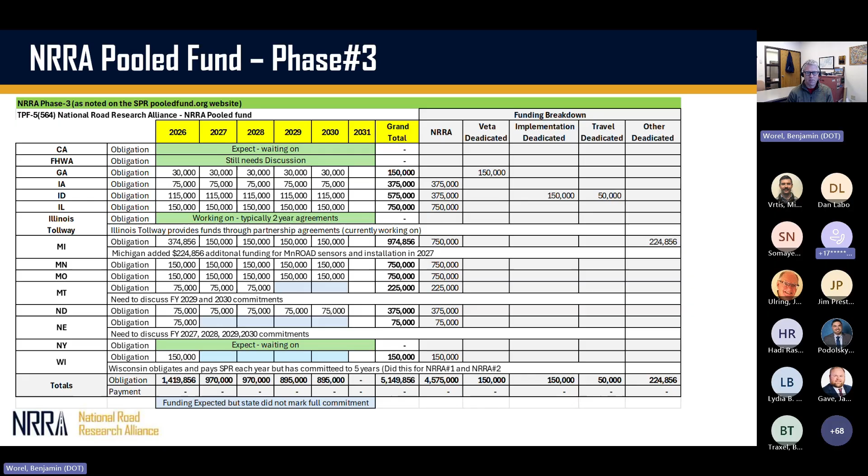So when it all comes down to it, when we start getting dollars in, and this is getting towards, well, how much money do we have to spend? There's SPR dollars, I'm going to say dollars in hand, meaning what's shown on the website. So this is like one bird in the hand is worth 2 in the bush type of thing, where you're saying, we know we have so much dollars in hand, but we expect so many dollars. Like I said, Wisconsin puts in money every year. So you kind of assume that the money's there. And this is something I'm working on with MnDOT. In the past, we assume money is there, and money tends to come to be there to spend. So these two things here show what we have in hand or what we expect, a reasonable expectation.

So you can see how there's the NRRA activities. Some money was put in just for Veta. It shows 1 state's put in, but we expect 2, the 150 to 300. 1 state put some extra money in for implementation. Travel, 1 state put more money in, but we expect more to do that. And then the other was the concrete stuff. But again, we're working this with the executive committee. So when you looked at what the executive committee initially set up, they set up certain percentages for each activity. So we had research contracts, labor, sensors, shipping and stuff at MnROAD, out-of-state travel, the construction we wanted for the low volume road, and then tech transfer.

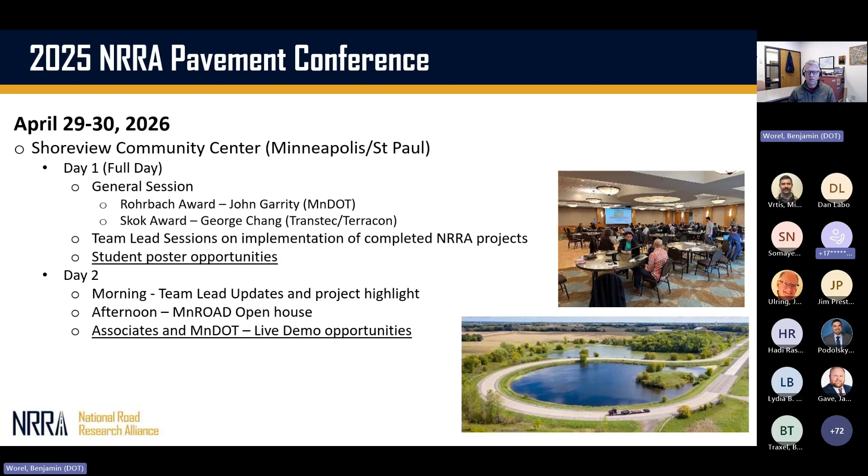But we'll also have day 2, we'll be doing some morning updates in Shoreview. Then in the afternoon, going out to MnROAD and having an open house. That's a good opportunity; there's been some groups talking about doing demos for equipment and things like that, maybe some presentations out there on what they're doing. So again, more information will be coming out in the future about the Pavement Conference coming up.

It's only 5 feet deep, so I didn't fish very long because I don't think there's anything there.

But the rest of the agenda: Michael will be filling in for Kurt Dunn for the Flex team. Tom will be working with the Rigid, ICT with Kyle, PM with Tyler, and Geo with Raul. Raul's gone, so I'll fill in for him. We'll probably do a little less Geo this time, so we'll leave some extra time for the Flex and the PM that I think have a little more time needs for this quarterly meeting.

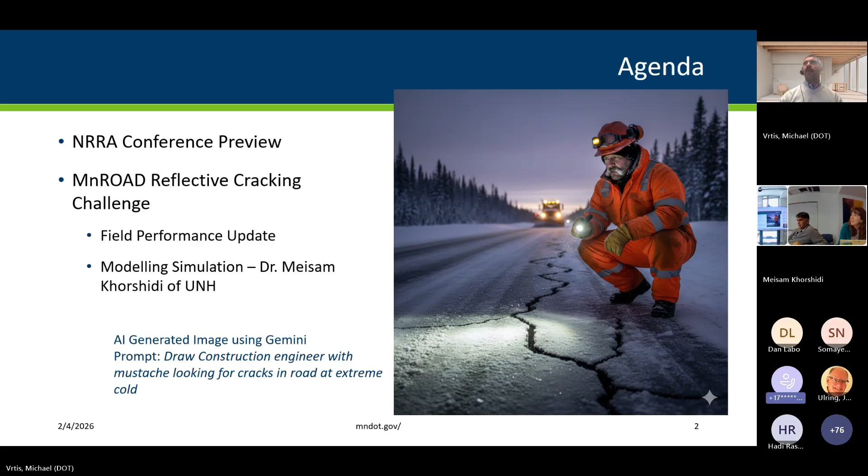So for the NRRA conference, we are going to be combining with the PM team and sharing some time. We're really excited about the speakers we have lined up. We have some really high quality and polished national speakers on exciting topics. How Kurt and I like to approach this, or the flexible team in general, is what are we working on? What's happening in asphalt that we want to share with the wider audience of basically a pavement engineering audience, not particularly asphalt experts. So what do we want our other pavement friends to know that Flex Team and Asphalt is doing?

So we have Dr. Bill Buttlar from University of Missouri on the companion sections to the sections I'll be talking about today. And then we have Dr. Jo Daniel of New Hampshire talking some balanced mix design. And then, looking towards the future, we have Dave Johnson from the Asphalt Institute talking about the Utah High Mod sections, or Utah High Mod mix. It is something that both the Flex team and the PM team have rated highly for future construction ideas. So it is something that we will probably look at through the NRRA lens. But Dave will give an introduction to that. And really, it's a highly polymer modified asphalt placed at extremely low air voids.

And then day two really is the teaser I'll be giving today. I'll do a more thorough performance update from the MnROAD sections, and then the lab testing correlations that go along with that will be provided.

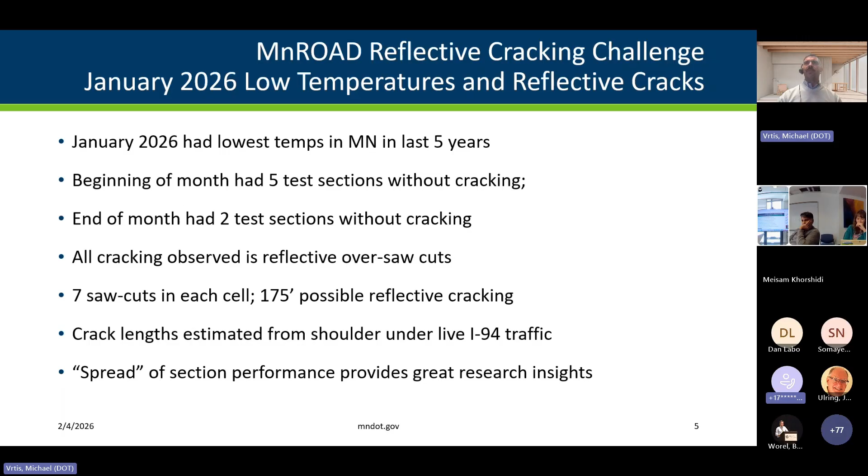So just a reminder, we took our conventional 400, 500 foot test section and we literally saw cut it in half in the lower lifts. So the 2 lower lifts total 4 inches thick, and there is a transverse saw cut at fixed locations, 7 cuts in each cell, same spacing in each cell, really providing the same platform 10 times so we could evaluate 10 different overlay mixtures. So I'll be focusing today on some of the control sections where we're changing the binder grade. And then additionally, I added section 2234 just to talk about some of the ones that have intermediate performance that's falling in between our control setups.

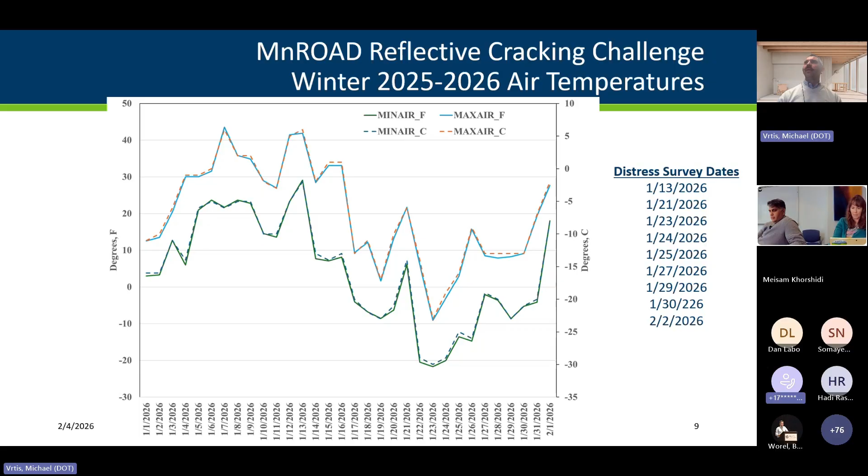Survey dates, we really were closely monitoring our reflective cracking and naturally occurring thermal cracks, which we did not see at all over the month of January. So as we were going through this cold stretch, we were looking at it almost every 24 hours, seeing what cracks were new, and when reflective cracking did occur. So summary, kind of picking earlier in the month before we had cracks, or beginning of the cold stretch, and then end of the cold stretch. Remember, it was the 23rd that was our coldest temperature.

So focusing on these 4 cells, 2239, a polymer modified 58H minus 34, held pretty steady throughout, where we came into the month with 2 out of the 7 cracks, 5 feet total, so very minor cracking, still visible. And then it ended with 6 feet total. The 49 minus 34 still has no cracks in any of the saw cut locations or anywhere in the section. Going to the other binder, the 58S minus 28, it was cracked going into January, and then a little bit of increase in the crack distance, but still pretty heavily cracked, reflective cracking throughout.

And then I added cell 2234 to this presentation. It started the month with no cracks, and then by the 21st, 3 out of the 7 had cracks, only 8 feet, so still just a couple feet in each of those saw cut locations. And then at the close of the month, we had 4 locations cracked with a total of 17 feet.

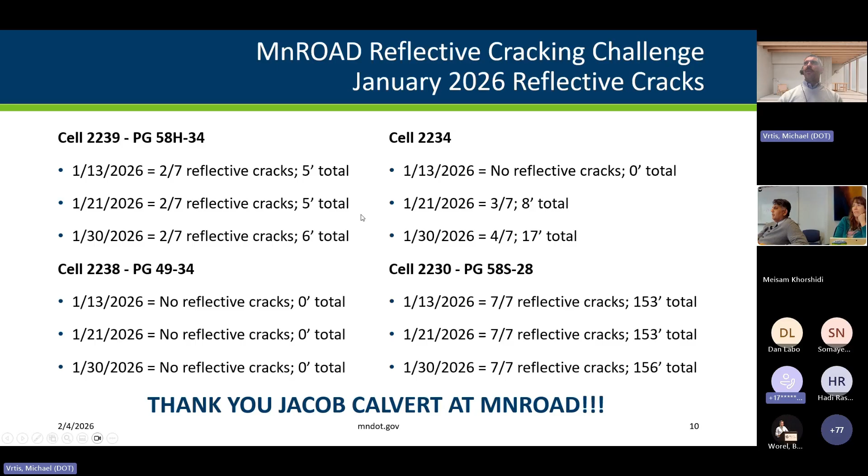All right, at this point, I am going to turn it over to Meisam to share the modeling updates from the New Hampshire side of things. All right, thank you, Michael.

I want to walk you through our report to predict the performance of the test sections using four mechanistic and mechanistic-empirical models, including Pavement ME, TxACOL, FlexPAVE, and IlliTC. For these models, the pavement structure, underlying condition, traffic, and climate inputs were kept constant across all the sections, and the only input that varied was the material properties, as Michael mentioned, measured in the earlier project tasks.

We also explain how mixtures were ranked based on the output metrics from each model and how we compare those rankings with the cracking performance that you just saw. Next slide, please.

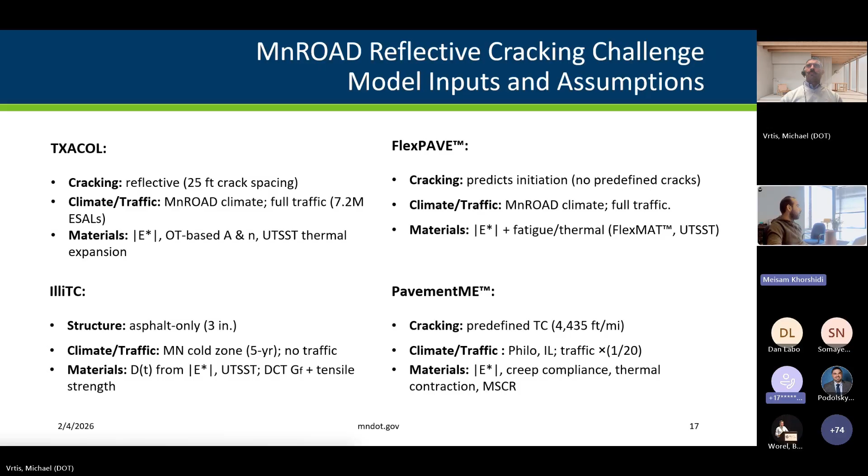So here I talk mostly about the materials we have used for each model. We mostly use dynamic modulus and also the thermal contraction and expansion properties for all models. But at the same time, we use some specific properties like fracture properties extracted from the overlay tester and also fatigue results to run the analysis in the models. Next slide, please.

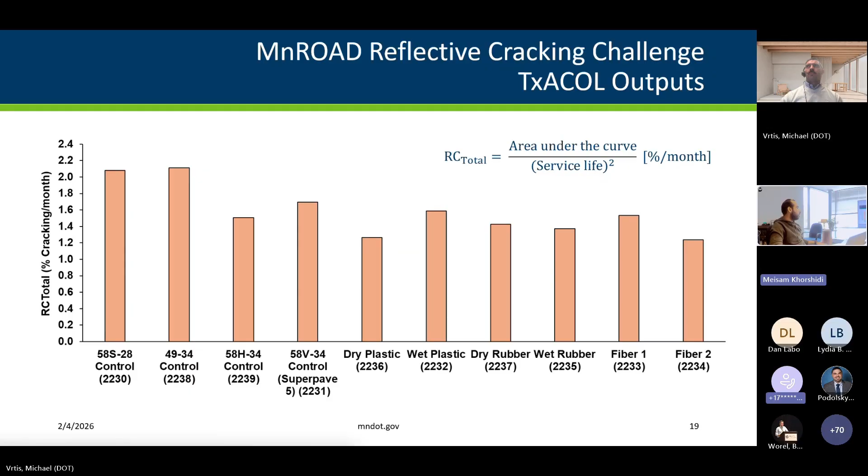Yeah, so we could get RC total based on the service life and the area under the curve, as you see in the equation here. So we could get a single value for each test section, and then we converted those to a ranking for each model, especially here for TxACOL. Next slide, please.

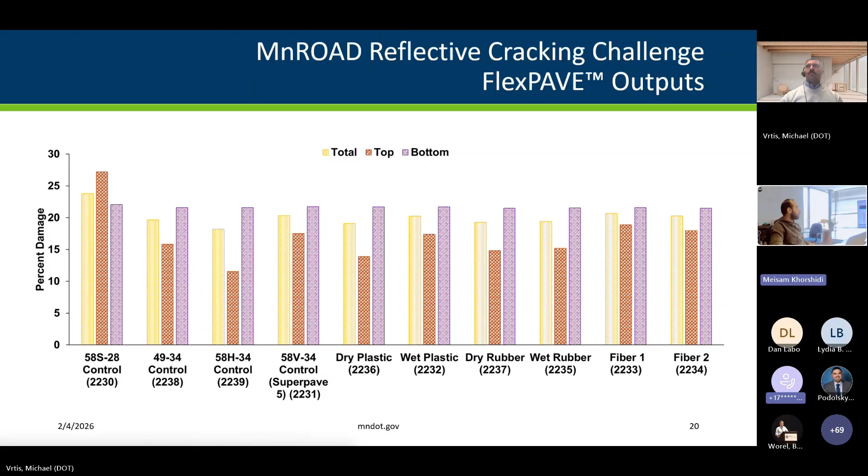For FlexPAVE, we could get percentage damage as an output for total, top, and bottom damage. And for the sake of ranking, we use the top damage to rank and compare the mixtures from this specific model or tool. Next one, please. Can you go here?

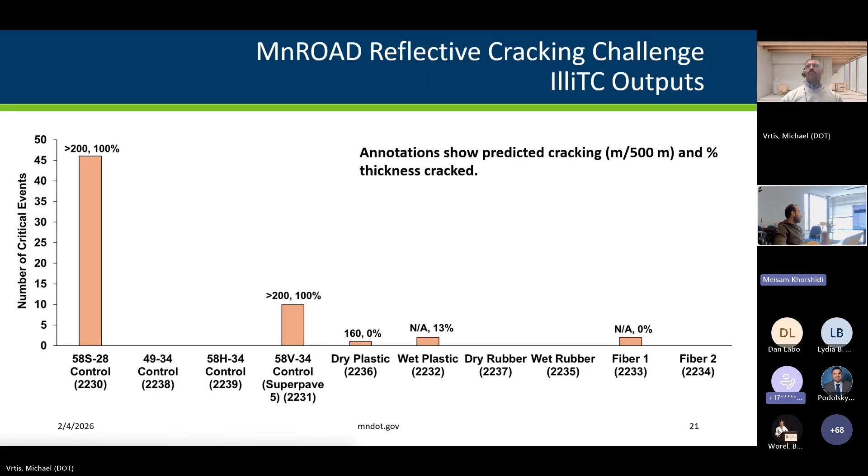And for IlliTC outputs, we got three different outputs, but we use the number of critical events because we could get more distinction between the mixtures and test sections here. So we look at the number of critical events, but as you see, the annotations on the top of each bar show the predicted cracking amount and the percentage of thickness that has cracked through the overlay layer. Next slide, please.

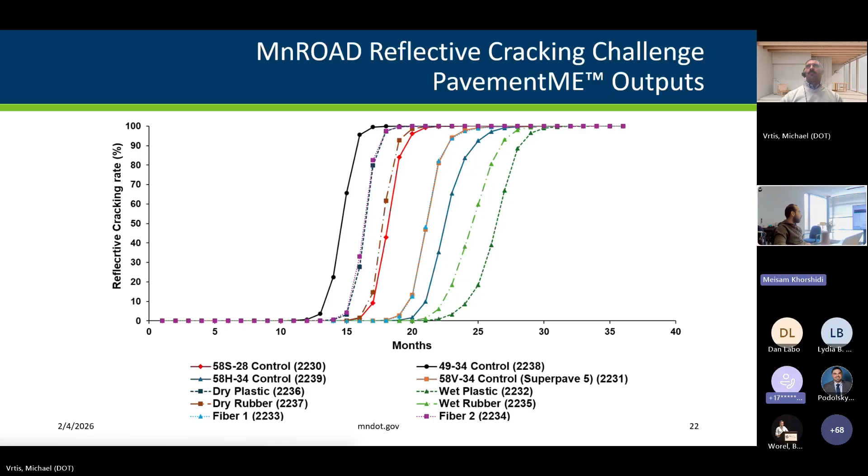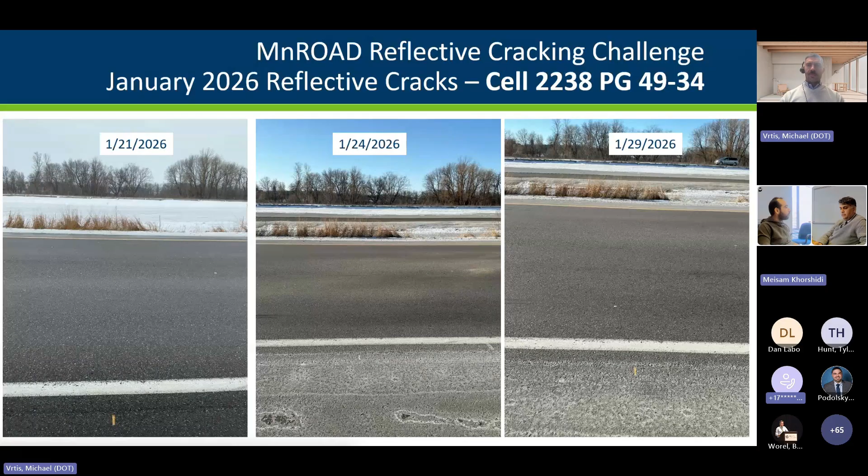Tom, you ready to present for the rigid team? Sure. Let's see. I can see your presentation. Mm-hmm. Is it in a good mode? Good enough. Go ahead. Okay.

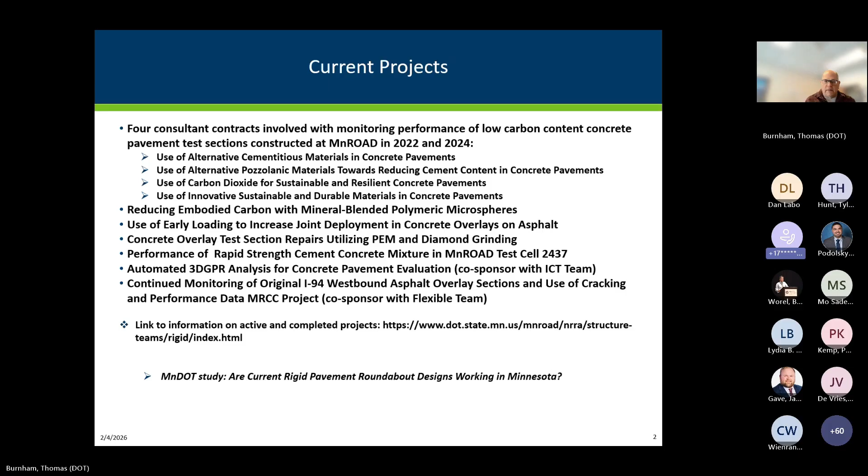Projects in development: Ben mentioned that we have several lined up for contracting to continue monitoring the performance of those low carbon concrete test sections. And we're starting to plan for some sections on the low volume road and also the stockpile area. Some of those ideas involve placing materials that have been used at the UC Davis Lab to Slab project, and also some sections that the University of Pittsburgh has been studying. Similar to MnROAD asphalt and the NCAT track, this would be a concrete version, where we have sections built in different climates with the same materials.

We also have interest in understanding the opportunity of maybe reducing our dowel bar diameters. So we put together a test section where we will have various configurations of dowel bars, both size and spacing.

And then something called the pavement buckling test pit that I hope we can explore. That would be put in the stockpile area, where we would try various surfaces as well as materials underneath and try to understand the mechanisms that cause the pavement buckling we continue to see during very long hot stretches in the summertime. We're hoping we can tackle that this year because it's a little more affordable than some of the full-scale sections.

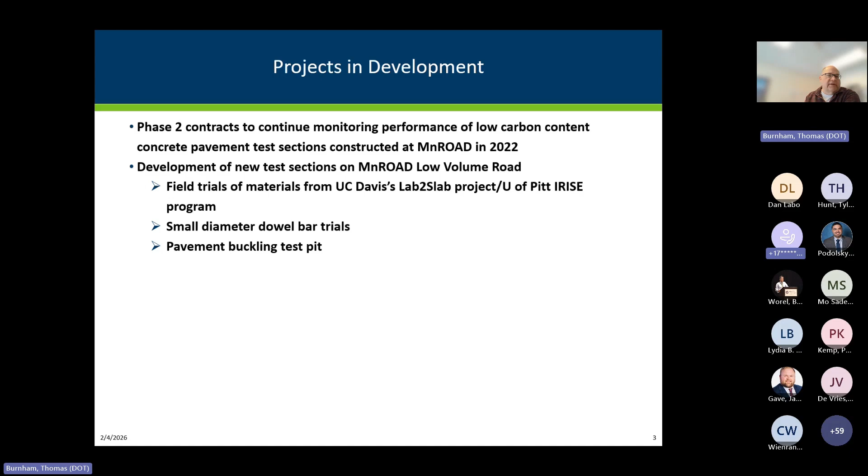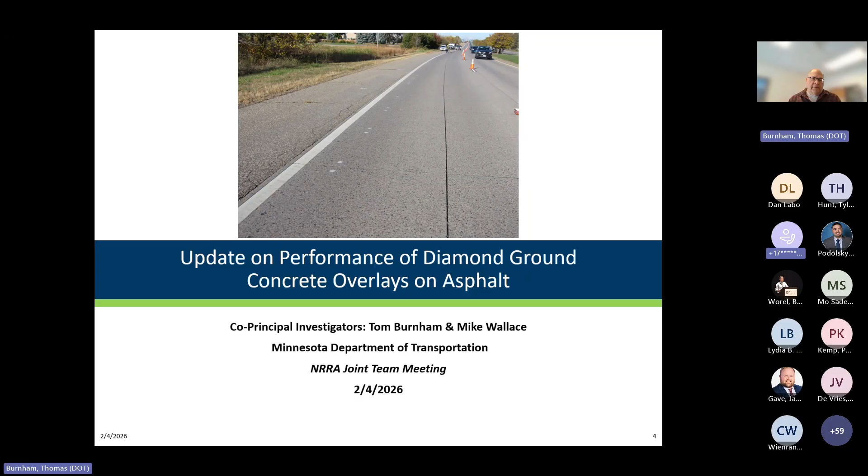So I'm going to devote the rest of my time to giving you an update on this project of the performance of diamond-ground concrete overlays on asphalt. And that's being done again by me and my colleague Mike Wallace. So I'll give you some background, the objectives, and then talk about some performance results from the 4th year of the Woodbury project and the 2nd year of the I-35 North Branch project.

So just so we're clear about what we're talking about, concrete overlays on asphalt, often in the past called whitetopping: a concrete overlay on an old asphalt layer, typically milled, not always, but typically milled to improve the bonding, and then just whatever's underneath as far as base and subgrade.

Some of the features of these thin concrete overlays is that the panels are pretty light. When you start to look at the weight of the actual panel, in this case a 5-inch with the 6x6 panel, which is very typical, it weighs 2,250 pounds. Now you compare that with your axle weight, which you look at 9,000 or more. These things can get pushed around quite a bit. It's not like a big, huge, heavy slab that we have on normal pavement.

And again, for concrete overlays on asphalt, the panels are bonded when they begin. What we notice is that over time, at least in the Minnesota climate, we start to lose that bond. Water gets in the joints, starts working at the bond, and once you lose that bond, then again, you have just a very thin pavement laying on top of an asphalt layer. And really, the idea is that you'd like to take advantage of that bond and reduce the stresses in the concrete surface.

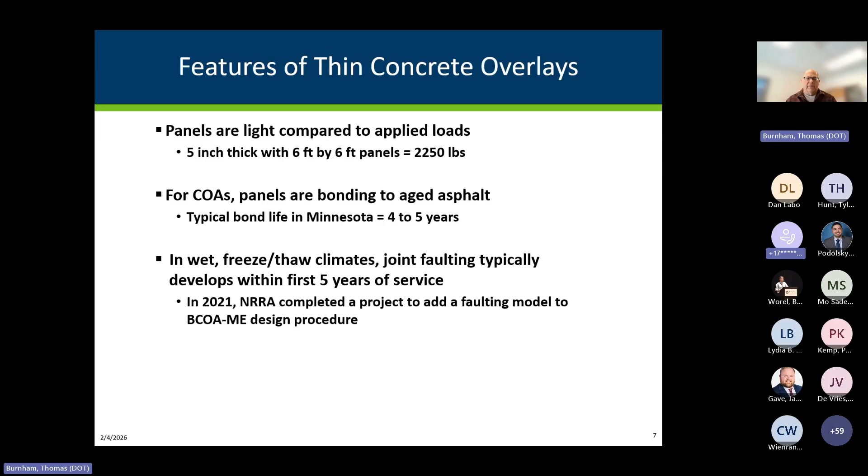Now, in wet, freeze-thaw climates like Minnesota, we have seen a pretty regular trend that the transverse joints start to fault, typically within the first 5 years of service, which is not something you want to happen. And in fact, this has been recognized, and back in 2021, NRRA completed a project that added a faulting model to the BCOA-ME design procedure. So it's recognized that this happens, and it's one of the distress mechanisms that we have to deal with for these kind of concrete overlays.

So the study objectives here, this is part of a larger study, but I'm going to focus here on determining the efficacy and the longevity of diamond grinding as a mitigation method. So if we have faulting in these concrete overlays and you go out and diamond grind it, how much longer life do you get? And again, this particular study involved a section in a suburb here, Woodbury, Minnesota. Also 4 MnROAD test sections, and then another section up on I-35 Interstate, North Branch, Minnesota.

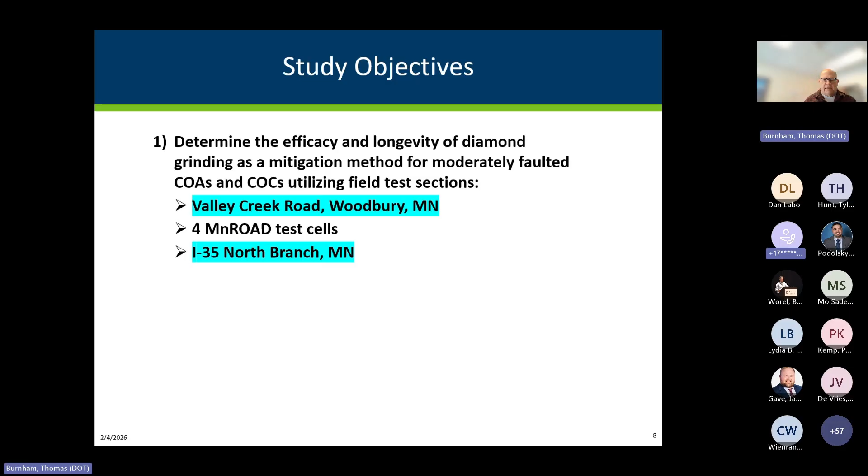I'm only going to cover the ones in blue there, the Valley Creek and the North Branch. The MnROAD cells, that analysis is kind of done since those cells have been removed. I could kind of say that because of the extreme interstate loading and the condition of those sections, they didn't perform very well, but we can kind of compare that with what we see with maybe a more normal project.

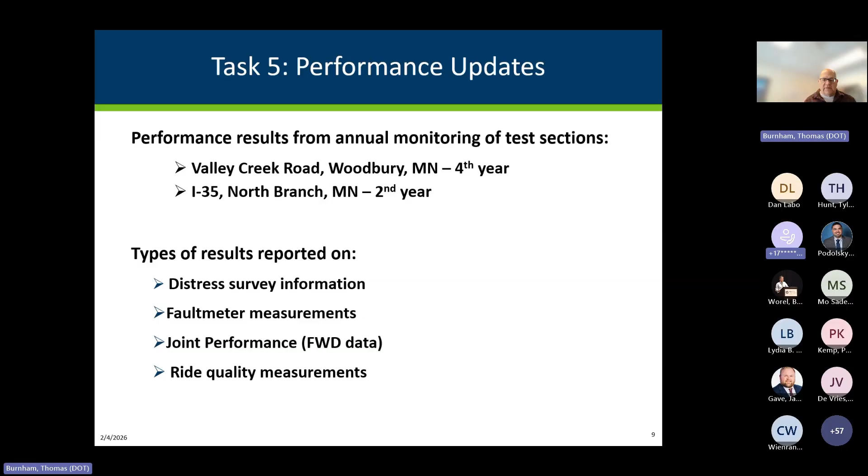So performance update, again, we're on our fourth year of monitoring the Valley Creek Road project, and then on the second year of the I-35. And the type of results I'm going to report on is distress information, just general condition, fault meter measurements, joint performance based on FWD testing, and then ride quality measurements.

So Valley Creek Road is a 5-inch thick concrete overlay on 4 inches of remaining asphalt. At the time it was milled, it was 42 years old, so something to think about when we're talking about these concrete overlays, that the asphalt underneath is not in its prime of life. So something to consider. Again, 6x6 panels, which is very standard design. This happens to be a suburban collector route, so not a lot of heavy trucks, but just a lot of general traffic and quite heavy during rush hours.

It was constructed in 2012, and by the time it started developing pretty noticeable faulting, Washington County decided to diamond grind it in 2021 to kind of see how it was going to do. And at the time, the condition of the concrete overlay itself was pretty good. There were very minimally cracked panels. So again, they're just going to go out and diamond grind it.

You can see the pre-grind average fault meter readings range anywhere from 1 to 4.5 millimeters with an average of 2.2. And it doesn't sound like much, but when you get over 2, you can really noticeably feel and hear the clunking of the tires over those joints.

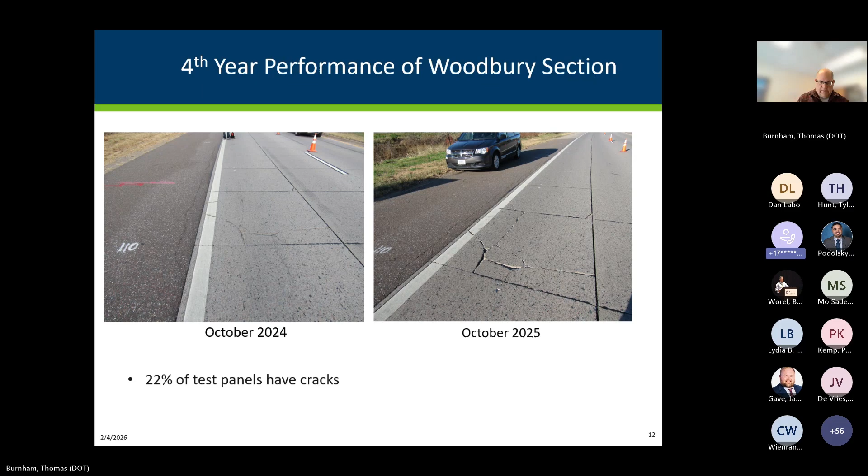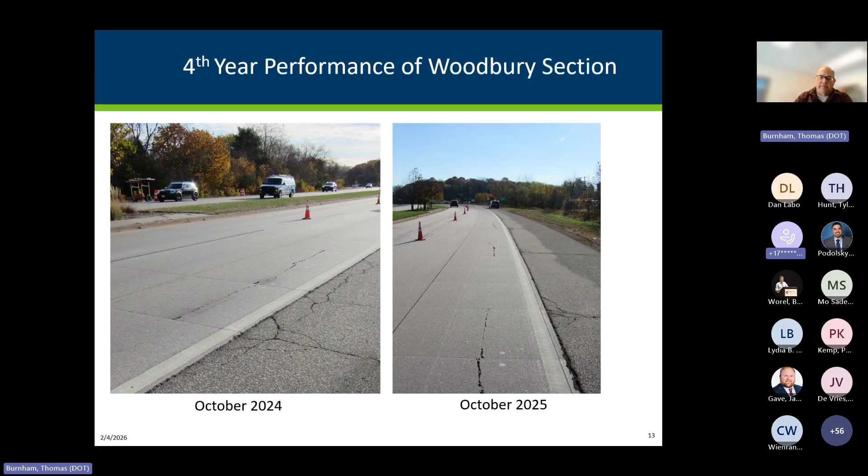We did notice near the end of the section there's kind of an opening of the mid-lane joint, to the point where it's almost as wide as a quarter. Sometimes we see this, especially with ones that have not used tie bars across these joints. So again, they kind of drift with time, and it probably is also an indication that you've lost your bond with your asphalt, so it's kind of drifting to the side.

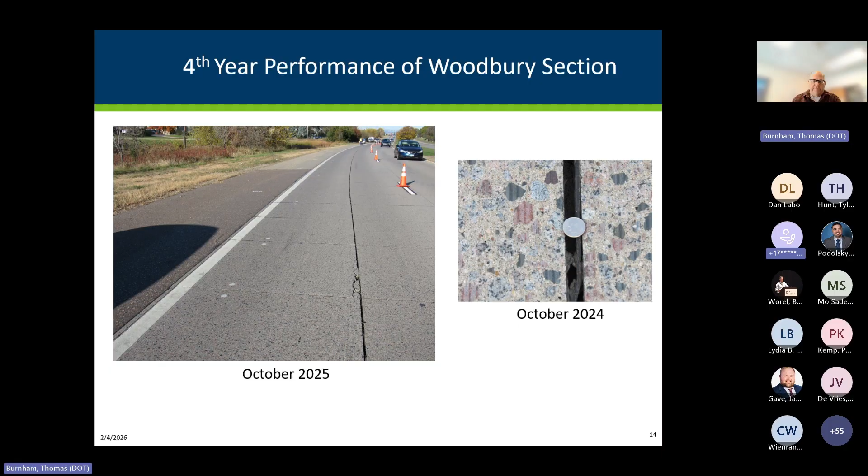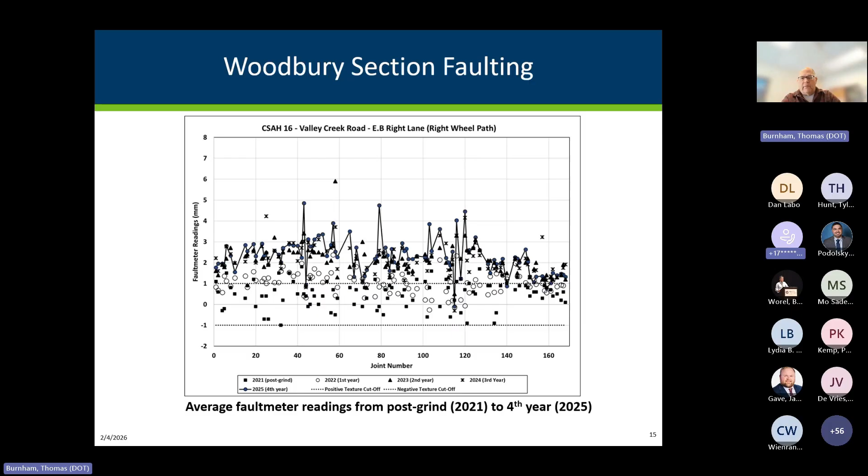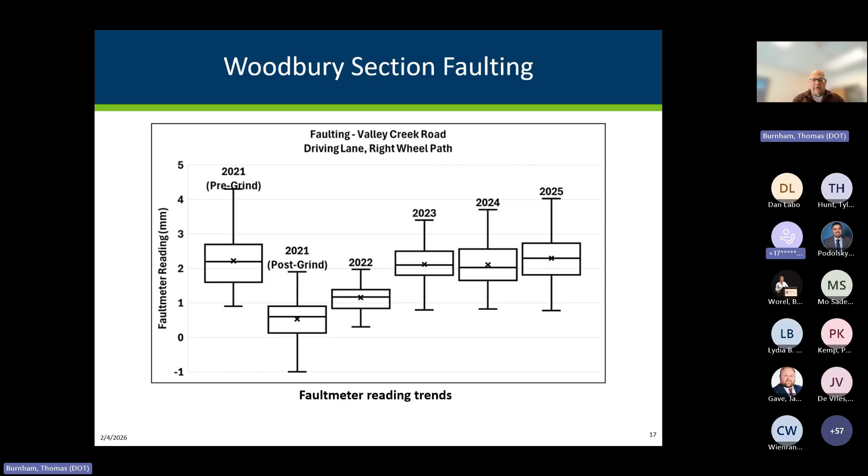It's not changing much, and you can start to see the whisker plots there showing that there's quite a few more joints now getting much more faulting, and it's starting to look like where it started. So ultimately, you can say they maybe got about 3 or 4 years, and they're kind of back to where they were in this particular project. Kind of unfortunate.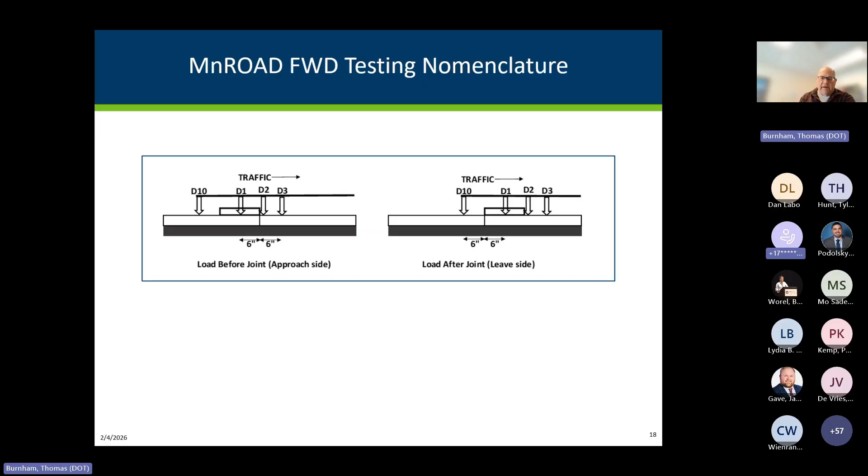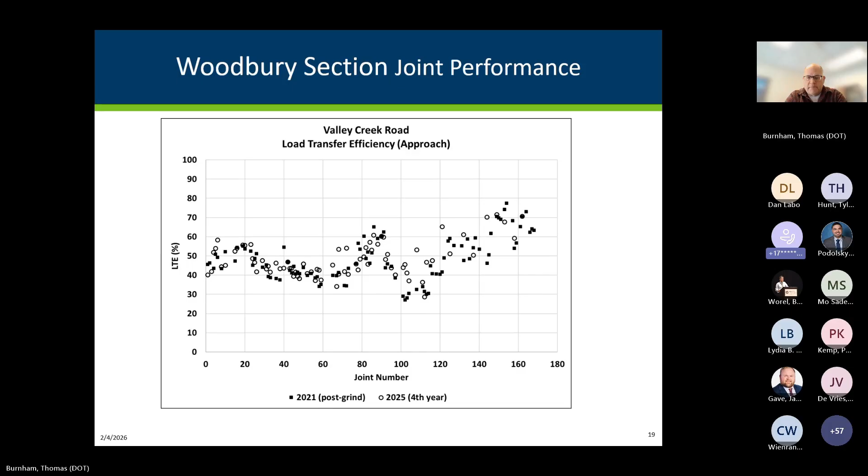FWD testing. This is some of the nomenclature. We typically test before the joint and after the joint. So this is kind of what it looks like here. Again, just showing the joint performance post-grind, and then 4th year. Again, very little change. Same with this. Again, load transfer efficiency. You can see they're not very high.

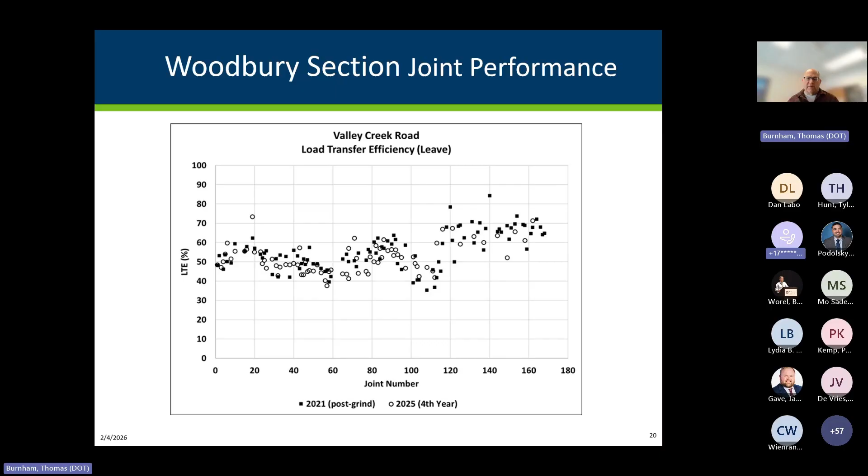We should not expect too much difference here since we really didn't do anything to the joints. We didn't do anything underneath to solve the issue which caused the faulting anyway, which is the lack of support. So we don't expect big changes, although I went back and looked at the data and noticed that actually the load transfer efficiency dropped after the 1st year, but then it came back. So some of it's seasonal variability, but we always try to test in October, and we've had pretty good luck with consistent climate conditions when we do this testing.

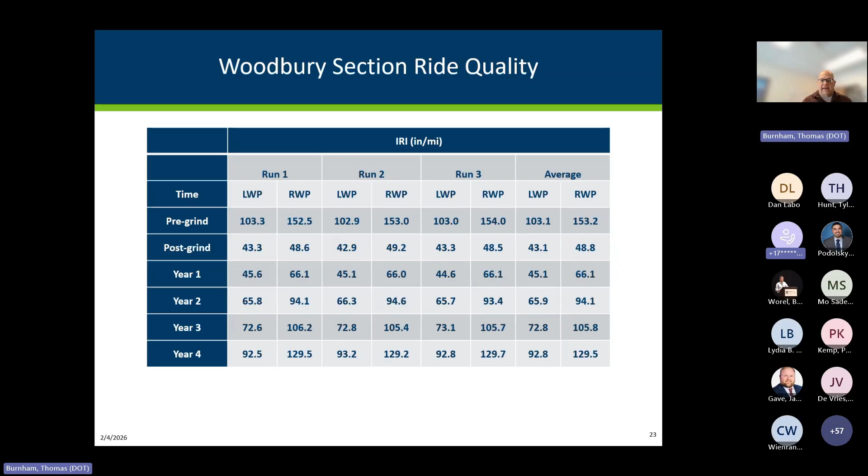And then this shows the ride quality history. You can see we started pre-grind with IRI numbers as high as 150, dropped way down to 50 or in the 40s post-grind, and then within about 2 years back to 94. Now we're back up to 130. So even though the faulting has fully returned, the ride is still not as bad as it was before it was ground. So it's kind of interesting that it's lagging a little bit despite the faulting.

So in summary, the overall distress level, I would say, is low. The cracked panels continue to form and deteriorate. The lane separation appears to be stabilizing. The 4th year fault meter readings are very close to pre-grind levels, and the rate of faulting redevelopment appears to be slowing.

The ride quality is declining, and it's starting to approach the pre-grind level. So the county has asked us to test it one more time, so we'll be going out there in October again, and that'll probably be the last time we'll be monitoring it.

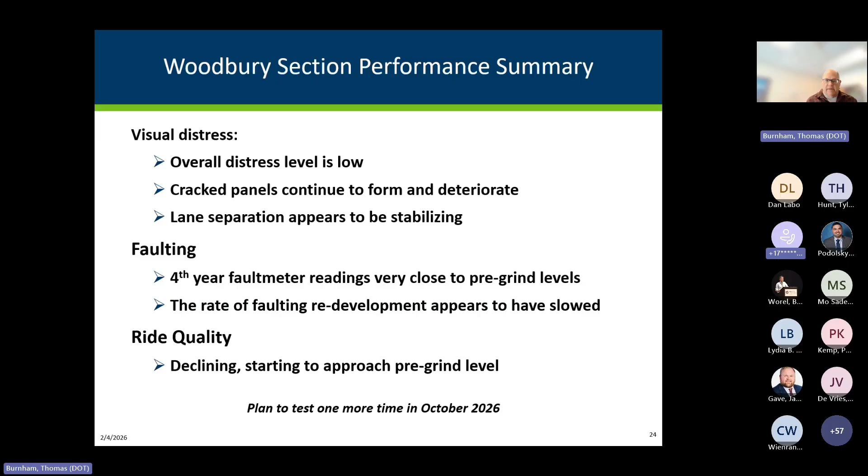Moving on to the I-35 project. This is an I-35 interstate north of North Branch. It's about 30, 40 miles north of where we're at here. 6-inch concrete overlay on 4 inches of minimum asphalt, 6x6 panels. Construction in 2009. At the time, there were some panel replacements, and then there was a diamond grind done. We selected a test section that only had diamond grinding, no repairs.

Traffic is kind of a rural interstate, I would say. It's not a real heavy truck traffic route, but it is an interstate. And you can see the pre-grind fault meter readings went anywhere from 1 to 3.6 with an average of 1.7. So not quite as bad as the Woodbury project.

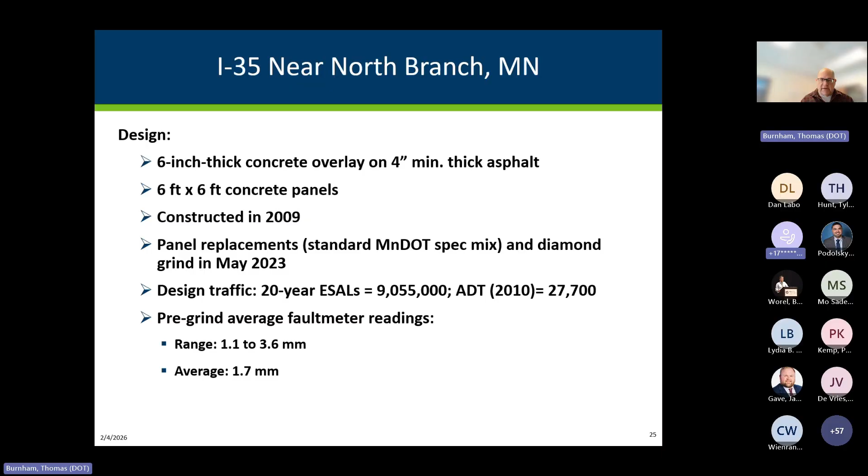Hey, Tom. Yes. Quick, speed it up a little bit, if you would. I'm almost done. Yep. Okay. No problem. Thanks. Yep.

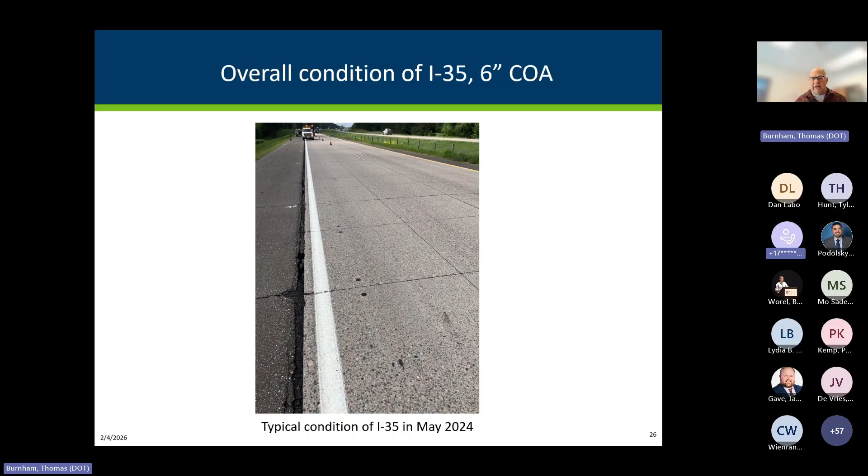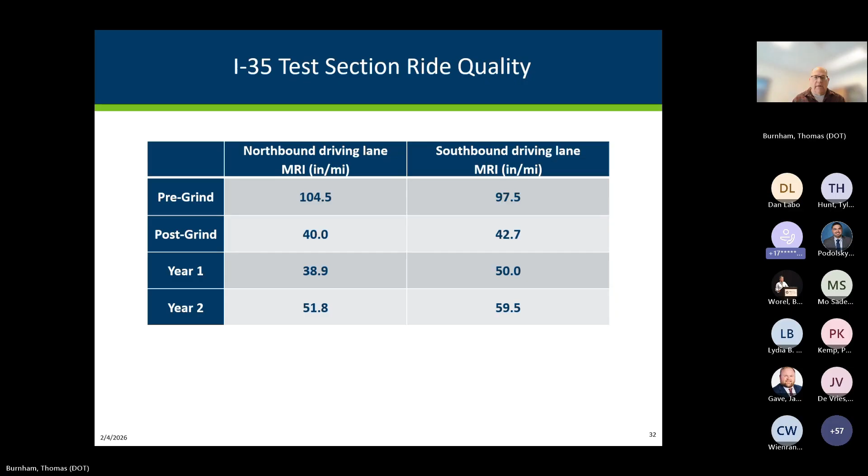So in summary, overall distress is still very low. Faulting, very small increase in year 2. And now we're starting to see the ride quality index again creep back. But again, it's a much lower rate of redevelopment compared to the Woodbury section.

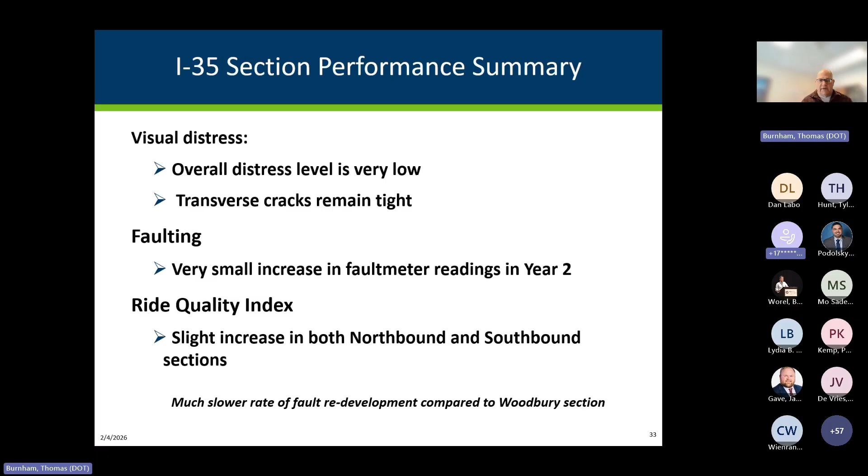We're going to continue to monitor these projects, one more year for Valley Creek and 2 to 3 more for the I-35. And then we have a draft report coming up to the TAP in March. And we're likely going to extend this so we can continue to monitor these sections, especially the I-35 project. With that, I'll take any questions.

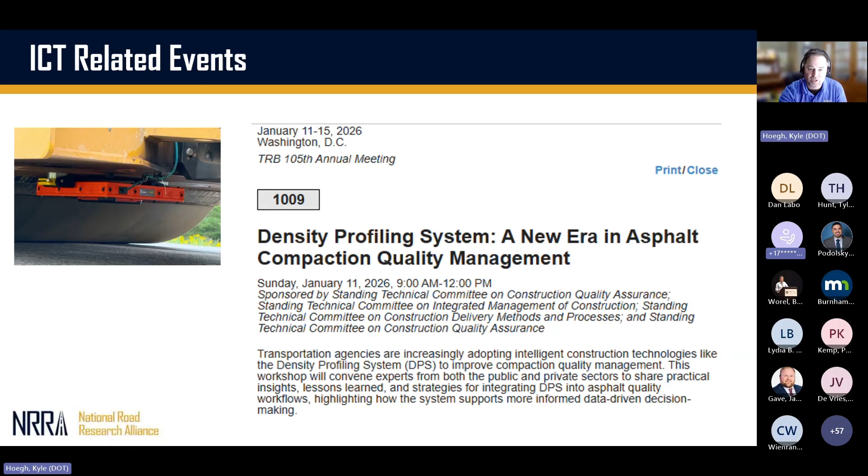We also had a nice TRB workshop on the density profiling system, and we should actually have some documentation from that conference as well. I know in the past sometimes there are e-circulars and things like that, and I know the DPS Pooled Fund will put together some meeting notes on that. And then of course George and Rebecca did a great job on the Research Pays Off for this group.

And then the second day will be an update on our current projects, and I think last time we met as a group, Sahil did a good job of updating on both of our projects, so we'll save that for next time. And then we're also co-sponsoring the 3D GPR study that Tom mentioned.

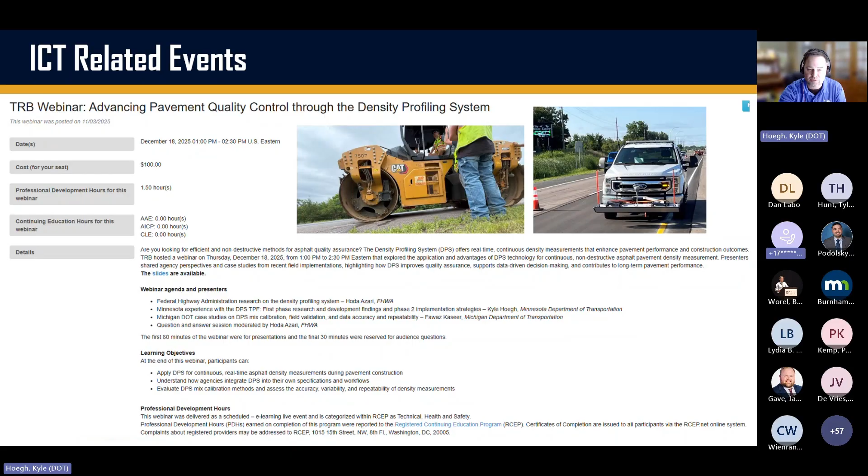So I covered a larger portion of this in a December TRB webinar that was well attended. So I just took a few slides from that presentation to make sure you guys are all up to speed on what's going on there. So the objective is the same as the first phase, still trying to improve asphalt density through implementation of DPS technology.

However, with the 17 states and Federal Highway, we have kind of less of a research focus and more of an implementation focus for our work plan for this pooled fund that just kicked off last July. And a big portion of this is on pilot projects and trying to get trial implementations and get the technology out there for people to use.

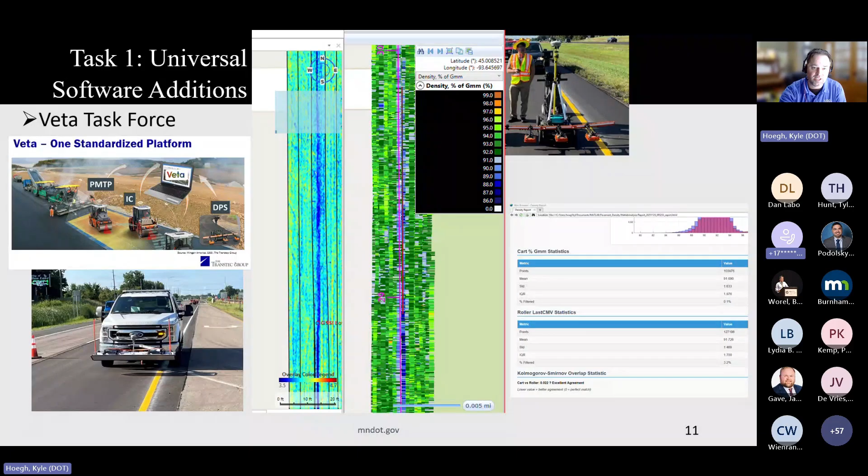So the biggest development here is being able to mount the DPS on the roller compactor, which has been a concept for a long time now. And we've actually been able to get it on 3 different projects in Minnesota this past construction season.

And I guess the biggest advantage, at least from my perspective here, is the safety and ability to get the data that we've been able to show is really useful, but do it without having an extra person exposed to traffic. So in this case, it's just mounted to the bottom. It's part of the paving train. We used it on the final roller compactor because we're more interested in quality management, quality assurance type activities, but it can also be put on a breakdown roller and other rollers for more quality control type activities.

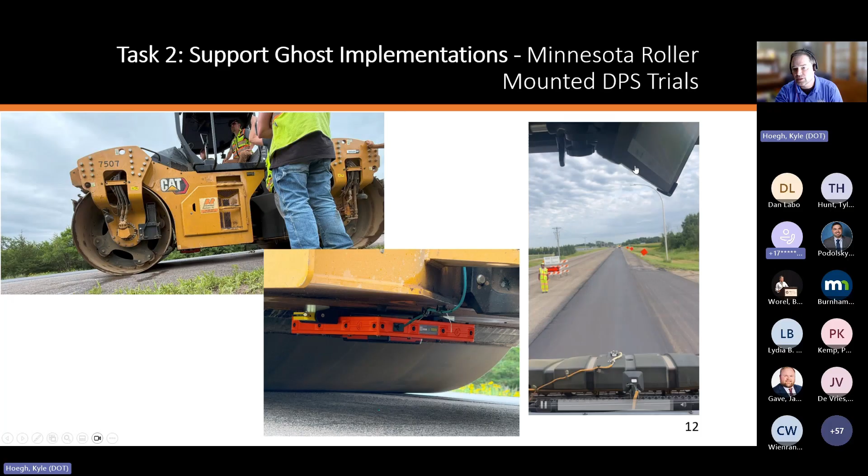But what you see in the video there is actually a live percent GMM coming in on this finish roller, and it's just getting mapped on that software as they're going along. So like I said, we have a lot of comfort with our cart-based collection that we do after the final roller, and we were able to do a lot of qualitative assessments and are starting to do some geospatial quantitative assessments to ensure that these trends of finding the lower and higher density mapped on the pavement can get picked up by having a sensor on the roller.

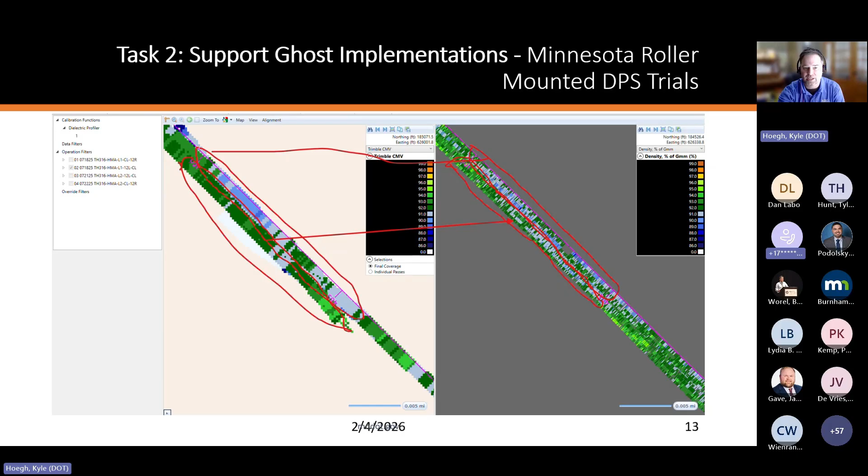And like I said, so far we've seen really good agreement between our existing technology and this new roller-mounted option. And just briefly, one initial way that we can use this type of technology that's lower risk than giving an absolute density assessment is just a variability type measure. And the advantage of this is that this technology is based on measuring dielectric constant, and changes in dielectric constant correspond to changes in air void content in each specific mix.

So in this case, because we know the dielectric constant of air is always 1, our variation in density is a really robust measure, regardless of what mix you're on. And some of the complications with calibrating to each specific mix are no longer as much of a barrier to implementation with this. So this is just an example of being able to look at variability within limit throughout 150-foot sublots on a project.

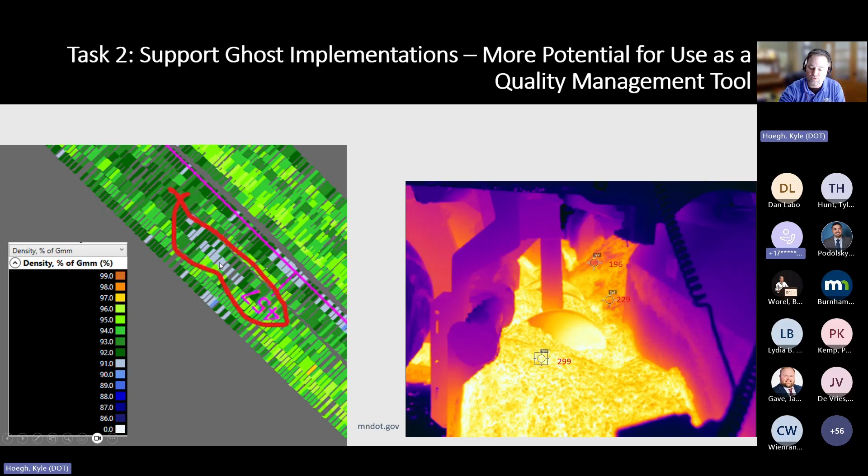And then before I end, also reminding people that just because the states are looking at it as a quality management or quality assurance tool, it's also a good tool for quality control, especially if we can get it on the breakdown roller. So this is just an example where there's cold mix near the gearbox in the paver, corresponding to lower density as measured by the DPS.

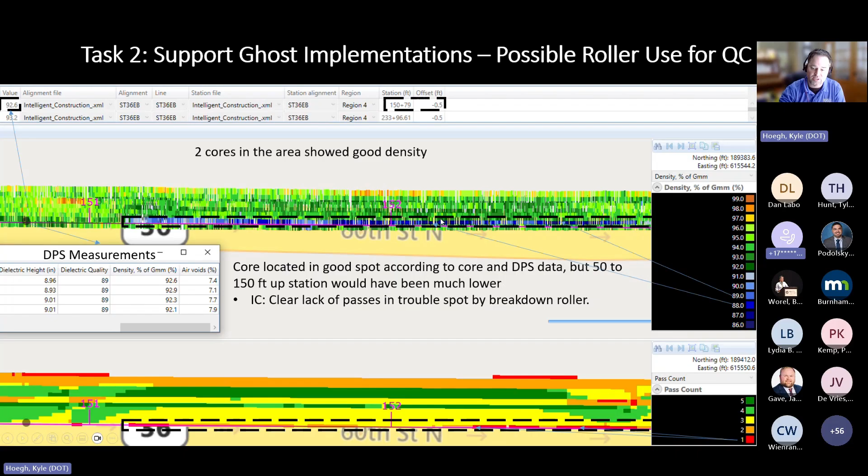There's also a lot of examples with comparisons with IC, this one showing less roller passes near the joint with the breakdown roller corresponding to lower density at the joint. And sometimes the fix is simple, where in this case with the echelon paving, the breakdown roller swerving around the outside of the adjacent paver was what was causing the lower density.

So hopefully with the implementation of all these ICT technologies and specifically DPS, we can start to see less of this type of paving on our roads and get longer lasting pavement.

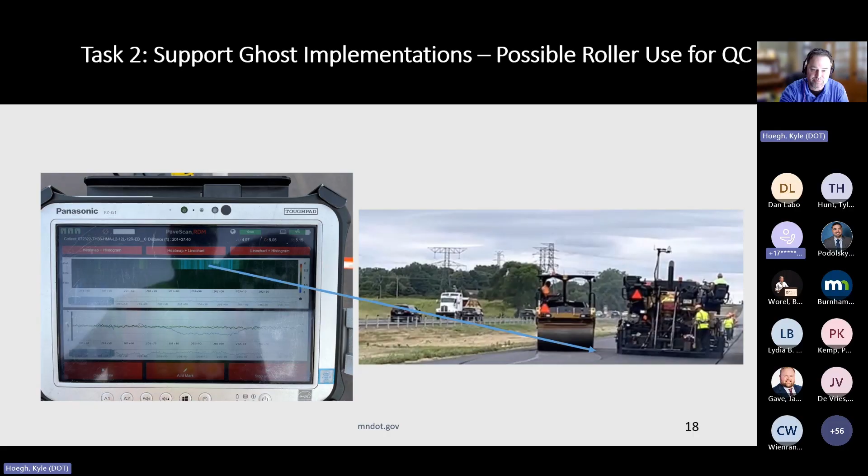So with that, we'll maybe take questions now or later, depending on what Ben wants to do. Why don't we try to do them in the chat, Kyle? Nicely done. Thank you for that. Yep. With that, let's go to the PM team. Tyler? I'm actually going to turn it over to Adriana to make sure she has enough time, Ben, and then I'll get to my presentation. Okay. Kind of quickly to go, if that works. That would work. I probably need 5 minutes at the end. Okay. So Adriana, if you're ready to go. Oh, yeah. Perfect. Thank you. Let me see. Make sure I'm sharing the right window. All right, can you see that?

Looks good. Okay, and I'll be brief because I figured we had a lot of information here, so I'm only touching on some of the highlights of the project. What we are doing here is for the use of recycled materials in pavement preservation, trying to establish a framework for evaluating the feasibility of different options for recycled materials.

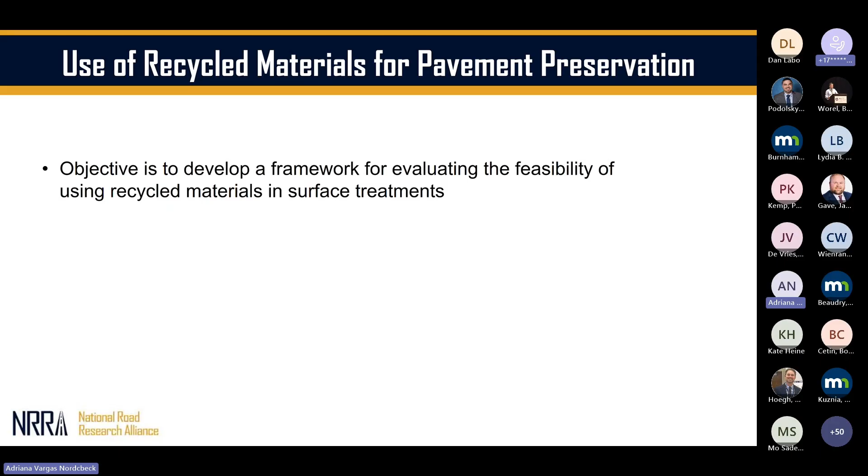After we conducted our lit review and a survey of the NRRA states, we went for the low-hanging fruit first and looked at 100% RAP designs, including microsurfacing, chip seals, and slurry seals. A lot of our effort was trying to obtain materials, because if we're getting aggregate from a given state, we want the emulsion that goes with that aggregate. So obtaining all of those appropriate materials was a very big part of the effort.

We ended up with type 2 microsurfacing from Ohio, both the virgin aggregate and the RAP, all coming from the same area. We did have some materials from New Mexico for chip seals as well; we've been working on a project with them and thought to leverage some of that. And for our slurry seal, we have materials from New Jersey. Same thing: the RAP, the virgin aggregate and the emulsion are all coming from the same source.

Just to give an idea of our results, looking at the microsurfacing results, we did see that the RAP helped enhance the raveling resistance. We can see with the wet track abrasion test, these orange points are for the virgin aggregate. The line here is the maximum loss as defined in AASHTO R 102, the one for microsurfacing. So if we go 12% emulsion content, we don't meet that. This is for the 6-day soak.

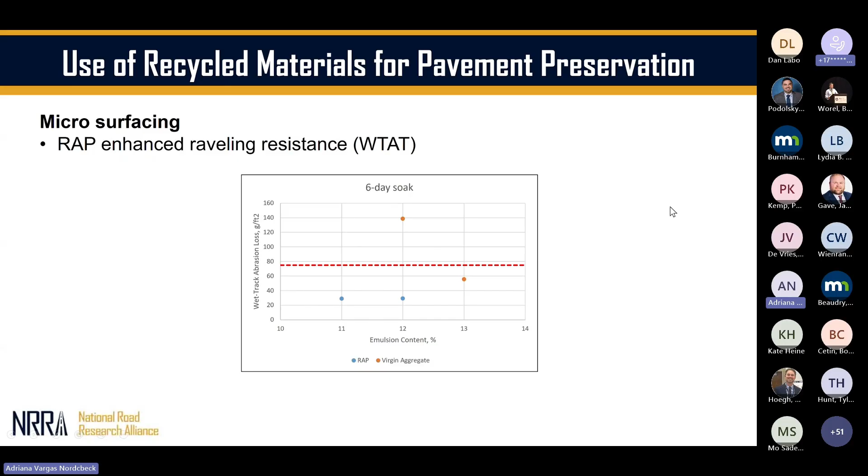We also saw improved cohesion with the RAP materials, and you can see there 2 samples, 1 RAP, 1 virgin aggregate. This is at 30 minutes. Both of them are meeting the requirement of 12 kilogram-centimeters, but the mode of rupture is different. The RAP is what they call a near spin, just a single crack. With the virgin aggregate, we see more cracking around. So it is important to note that although both are meeting the requirement, the modes are different.

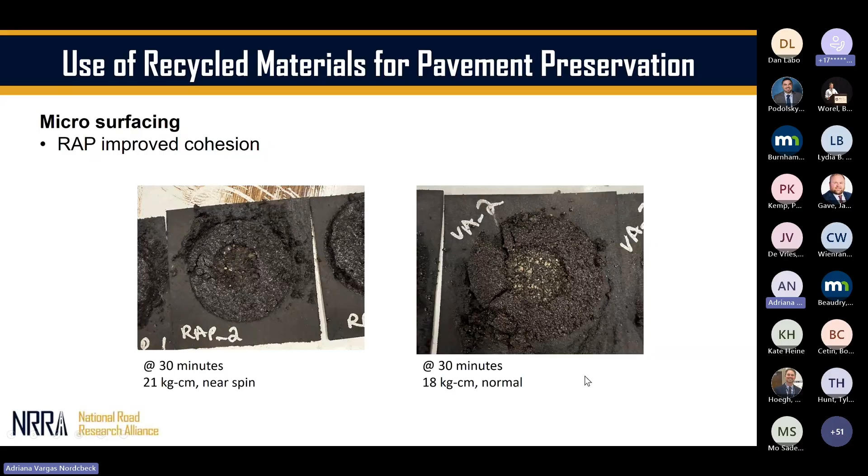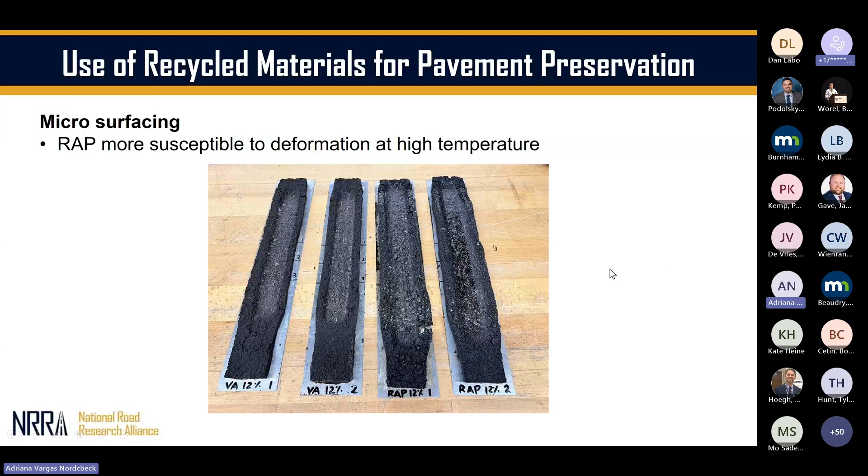We experimented a little bit with running the loaded wheel test at higher temperature. And we do see something that was reported by the contractor that supplied the materials, that with the 100% RAP mixes at higher temperatures, you could see more deformation. So you build it, you then go through a pretty hot summer, and you can see more displacement of the mix. And this is for the same emulsion content, but something to keep in mind. We'll look more into this.

We also did a little bit of testing with cracking resistance, and we didn't really see much of a difference between both of them. Of course, they have different contents of emulsion, but at the optimum, not a significant change in cracking resistance. And this test is pretty simple, and it's just a way to compare between two mixes. There's not really a number that you have to meet.

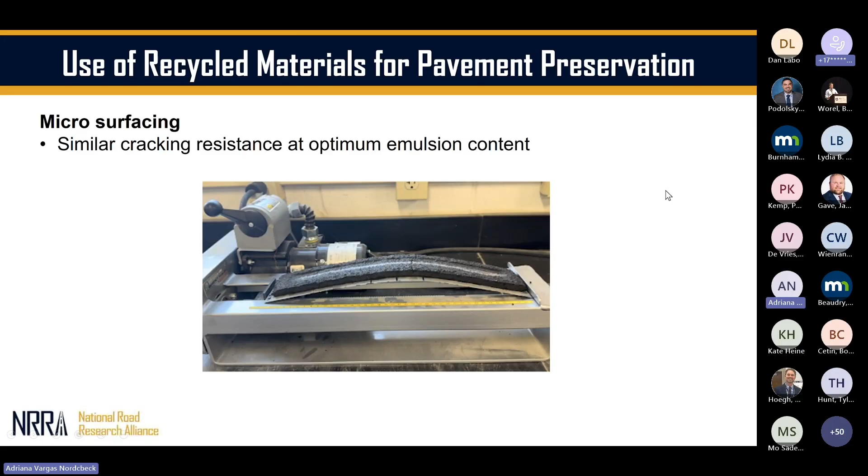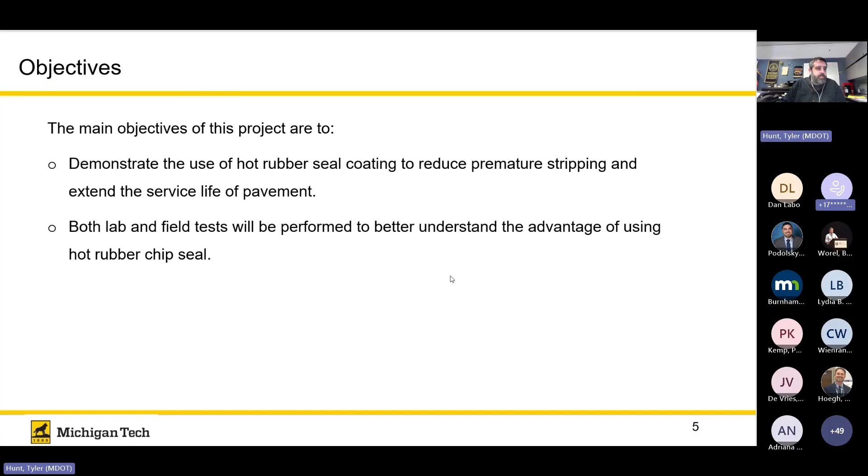There are 8 research tasks. We're sort of in the task 3/task 4 arena right now, where we're doing laboratory testing and then field construction and field testing. There will be a draft final report, and actually this project is coming up somewhat soon. I want to say July. Zhanping, if I'm wrong, you can correct me in the chat. So we're going to be rolling pretty quick here once things get finalized with all the rest of the testing.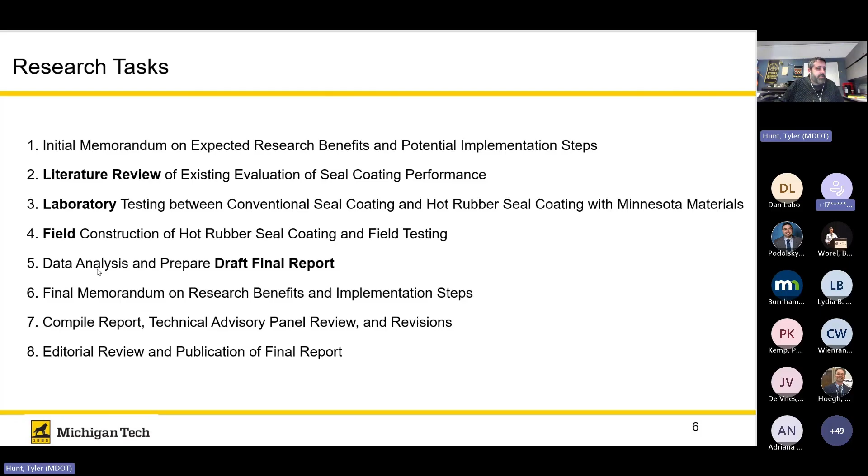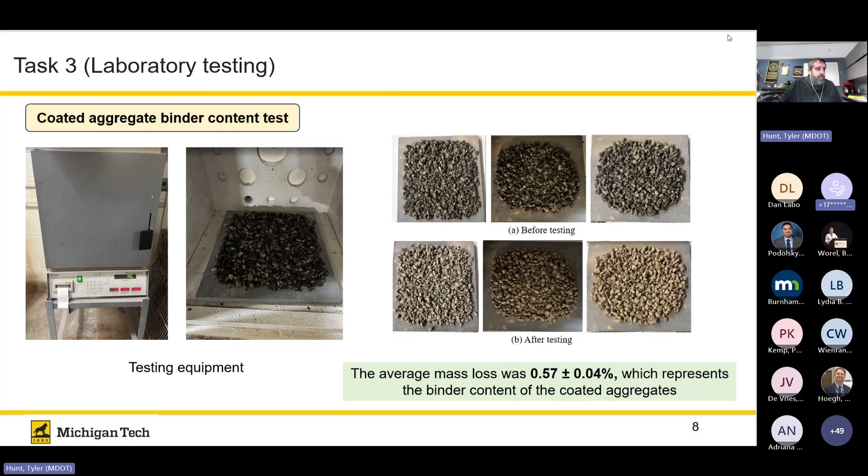As part of task 3, they did raw material collection of both the emulsion and the hot rubber seal coat on site to test the products. And there was also laboratory testing conducted. Part of that was the oven dry to find the average mass loss to determine the binder content of the coated aggregate. So there was testing to verify that as we went along, and there was a coated aggregate test section.

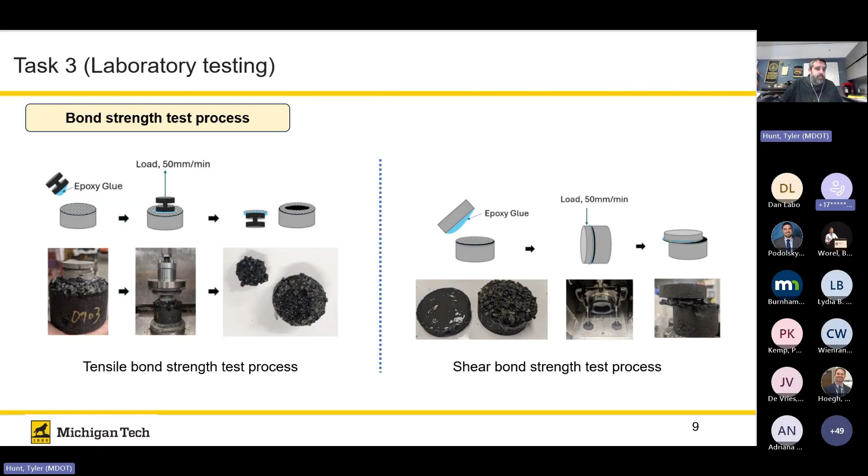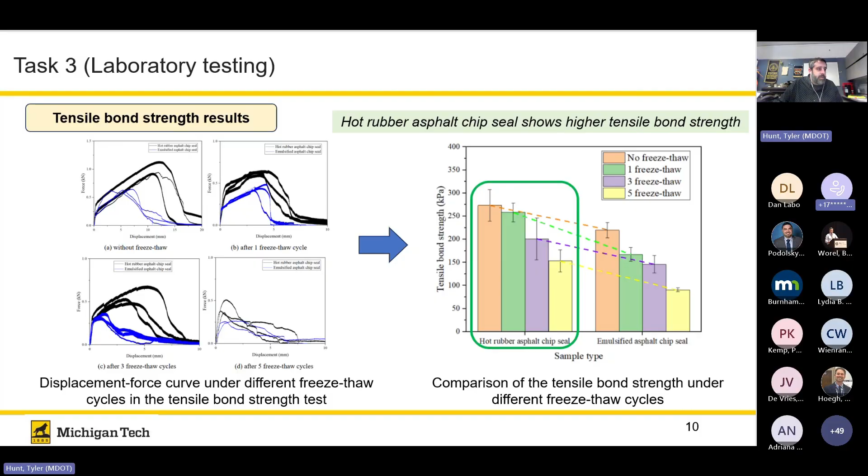The hot rubber seal coat also showed increased shear bond strength, especially in the no freeze-thaw regime and after the freeze-thaw cycles. So it maintained good bond strength throughout, and it appears that you can achieve a superior bond strength than the traditional chip seal emulsion.

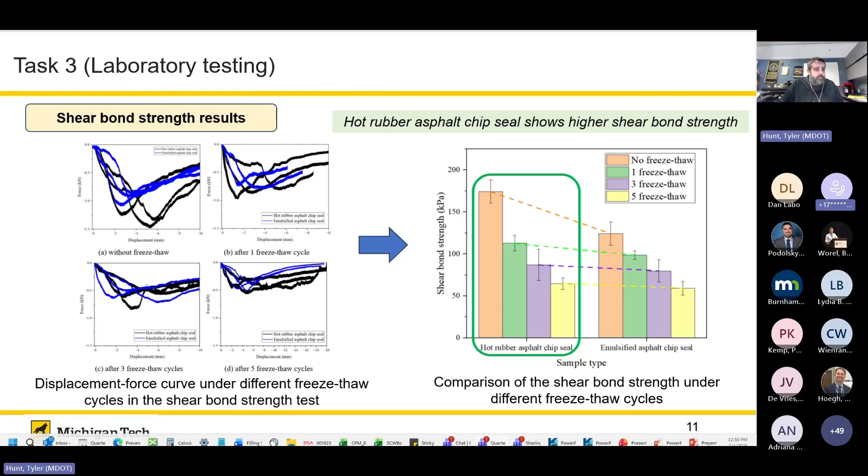We did construct a project back in July of 2024 with our Bay County Road Commission on M25, which is a MDOT route. There was quite a bit of testing done with the hot applied chip seal with coated aggregates. So all of westbound was the hot applied chip seal, and we had a small test section that included fog seal, and then eastbound was the same, but there was an emulsified asphalt and uncoated aggregate with fog seal control section as well.

That project went pretty well. It looks good to this day. I have Matt, my counterpart, out kind of keeping an eye on that project. We were a little concerned with it being a first of its kind on our route, but things have worked out pretty well so far, I should say.

I'm sorry, Dr. Yu, if there's a video here, I'm not sure if it's gonna play or not. I'm probably gonna skip through though, in the interest of time.

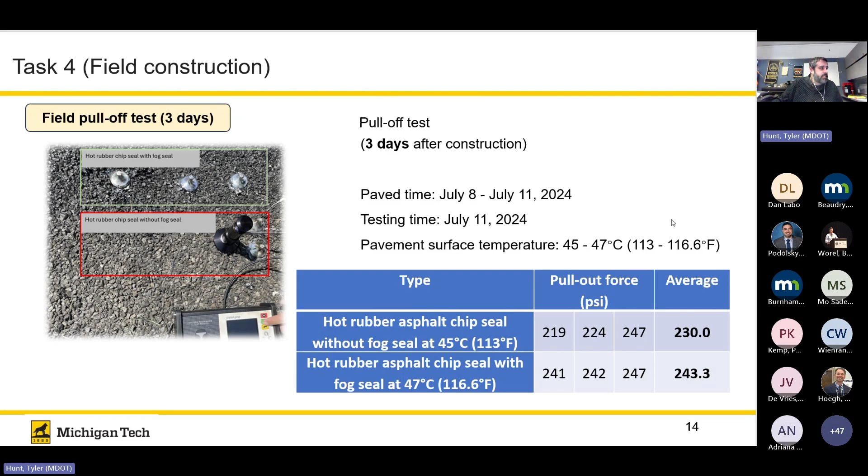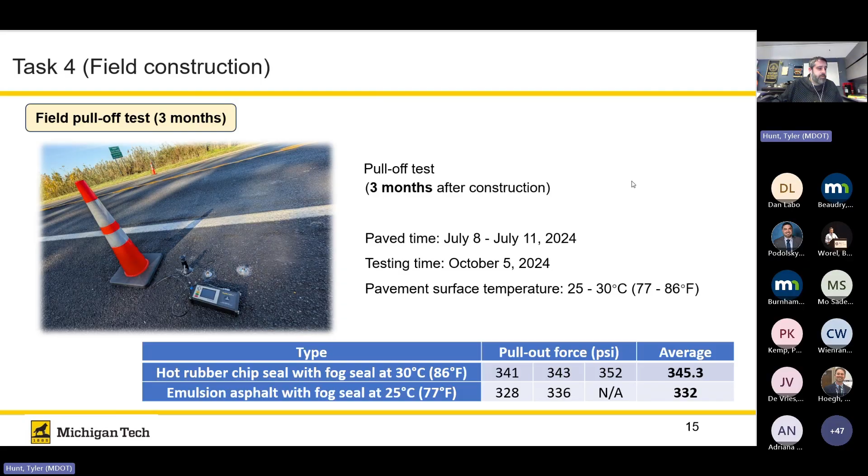The pull-off testing done as part of field evaluation indicated that it was similar in strength with and without fog seal, so an average of 230 psi and 243 psi in the pull-off tests. And then in comparison with the control section with emulsion, the pull-off test was 345 psi and 332 for the traditional chip seal. So I would say pretty similar results in that area.

We are also getting skid friction testing. The British pendulum was used on site, and this was done actually a year later. And the results were pretty similar to the traditional chip seal. So we're pretty confident in the friction.

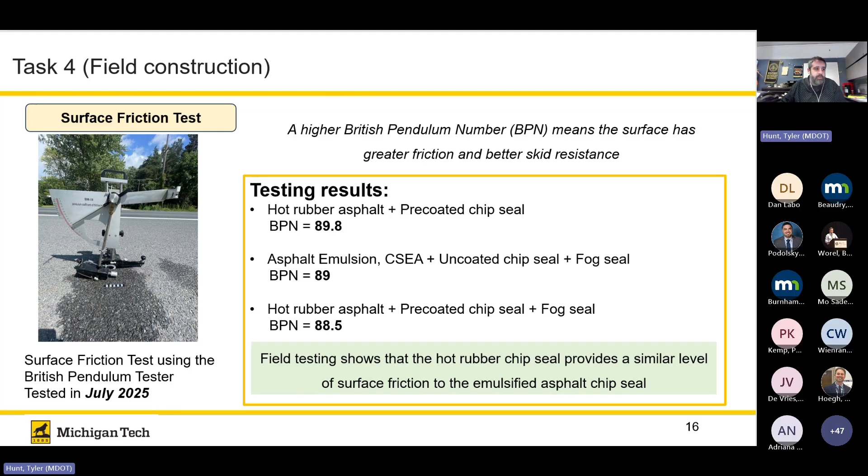I am having our friction unit collect in-house data, but unfortunately it is pretty restrictive on me being able to share that outside of the agency. I had told Zhanping that I could share it, but I got my hand slapped a bit on that. So I think we're going to have to host that in-house for now and just check it as needed. But I think the results speak to this point that there's a similar level of friction between the two treatment methods.

So just a timeline on the next steps. Submitting report 4, task 4, the report on field testing, is planned for February 2026. And then the draft final report and the remaining tasks, so the last 4 tasks, are June, I was incorrect, June of this year. So things are rolling pretty quickly with this job. And then we're looking at end of August for a completion date on this one. So more to come on that.

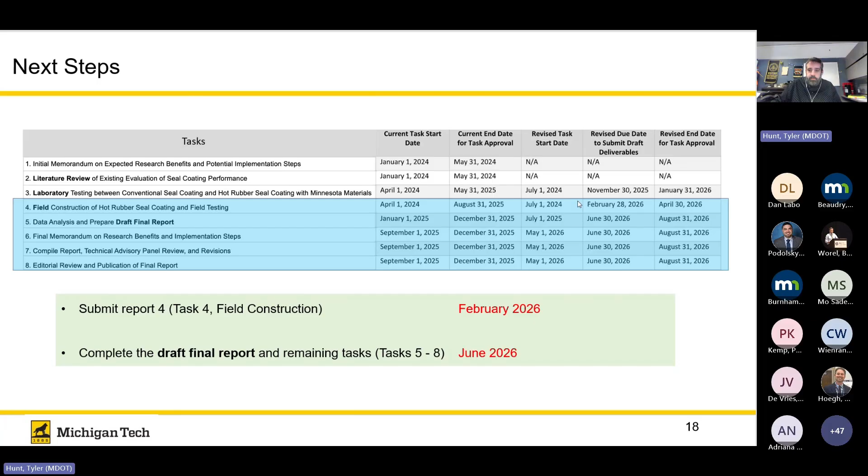And that's all. Hopefully I did that well, Zhanping. And if there's anything else, please feel free to drop in the chat. And I think, Ben, I'm going to give you back exactly 5 minutes here. So that's perfect. Thank you. And thanks for pulling that all together.

I'm just going to finish up. Raul's out today and asked me just to give a quick update on the Geotech team. Let me get back to sharing. And I believe you see a Geotech slide. Someone say yay. Or even a yes. Yep. All right, thank you.

So these are just going through the ongoing projects and the status. Again, this was a status as of TRB. Working with geotextiles for drainage: task 5 is ongoing, but that's quite a bit complete right now, 85% complete. The flooded pavement assessment app, again, this is what will be feeding into the test section we're developing out at MnROAD. And we're working with the technical advisory panel for that flooded road construction. That's 70% done,

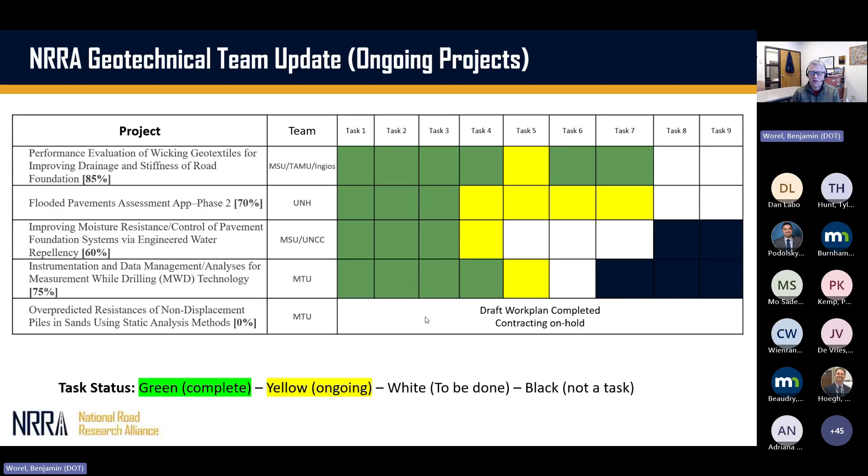along with 60% done on improving the moisture resistance of pavement foundation systems. Water repellency, the work that was done on the low volume road, that one is almost done too, as you can see. And I guess you can see them as well as I can. Any comments from the team leads on those? Anything above and beyond what's written there to help me out? If not, I'll go to the next slide. Again, that last one we're working on the contract for.

And some different ideas that the Geotech team has pulled together, and their voting. They had some voting, and we've talked with some of the different groups here too. It looks at some of the different things they might be looking at, for example lightweight aggregates. Maybe that could be done alongside other test sections. We could build a concrete section if they're working in the ditch. Whereas if we're working with recycled materials, that could be done under a concrete or asphalt section. So as we move towards taking these ideas, and thank you to the Geotech team for ranking these, these will be brought together and we'll have more discussions on what can be done.

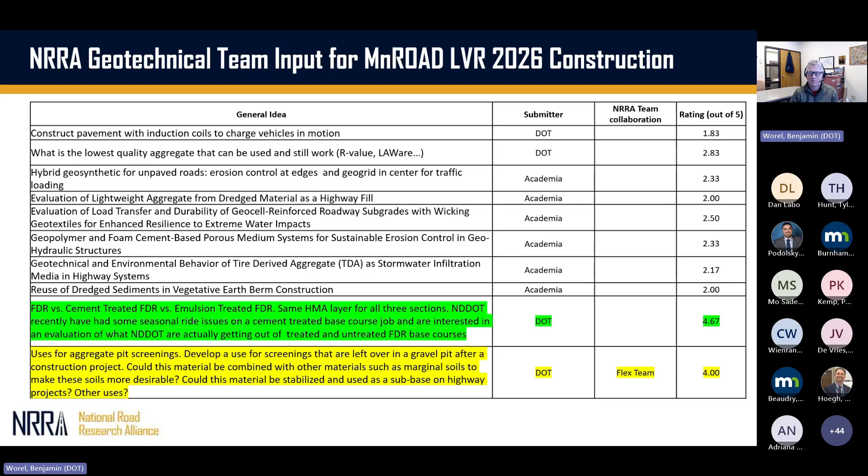And again, we talked about construction. This year is getting late in the year. I hate to say that when it's winter, but if anything, we can do partnerships, but maybe more of the full-blown construction for the main line and the low volume might be 2027. Time will tell, but you can see some of the ideas they had and how they were ranked, at least from this team.

So these are some of the different things this team has been working on. I probably glossed over it quite a bit, but that gave some time for the other groups to talk at this quarterly team meeting. So with that, are there any questions from the group?

Otherwise, thank you for your hard work on the teams, the team chairs, and the executive committee. The executive committee will be setting up a meeting for end of February. The chairs will be talking also at the end of February, working together and looking for advantages that we can take advantage of.